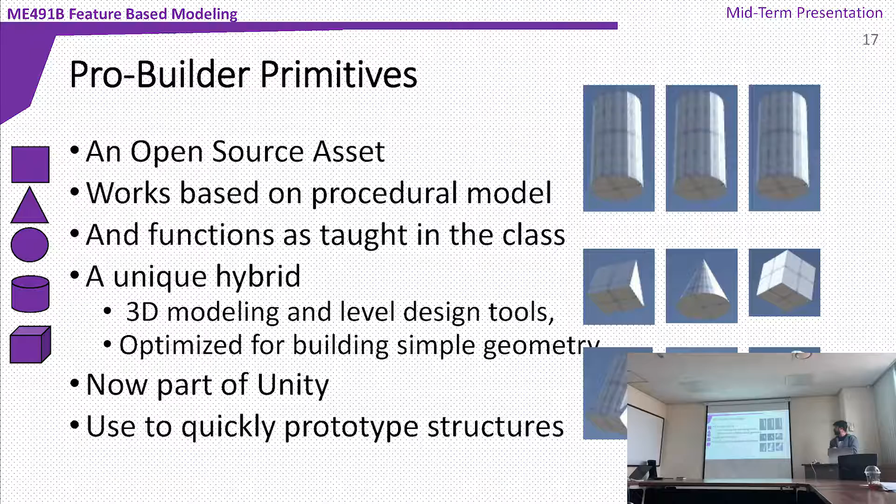And next is ProBuilder based primitives. ProBuilder is a unique hybrid of 3D modeling and level design, optimized for building simple geometry in Unity. It is now available as an asset, and it is also based on the procedural modeling approach. And as per Unity, they say that it will be available within Unity by the 2019 release.

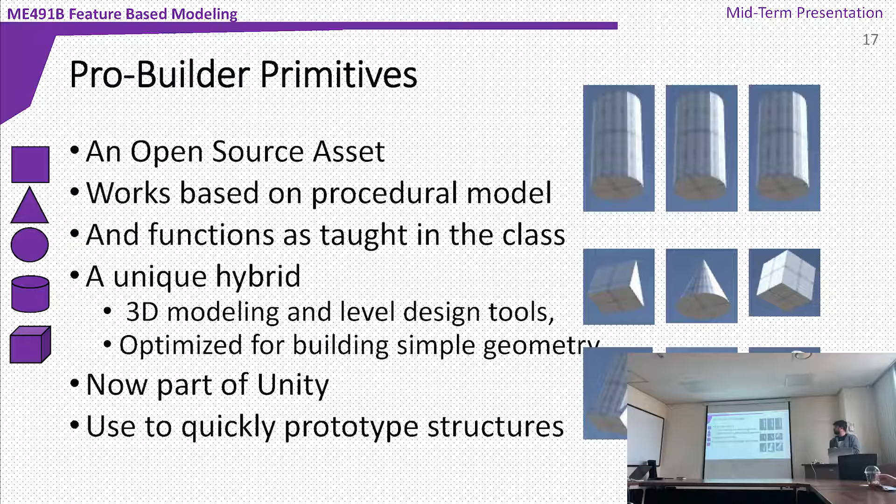So for ProBuilder we did some implementations, like this type of geometry can be made. This is a prism. So we can make something like this just by combining the primitives.

So when this approach is continued, or you remove too much material, there is a problem. The processor cannot handle it, and especially with respect to mobile, there may be some limitations to what extent material can be removed or what kind of material can be removed. So this is the implementation for that.

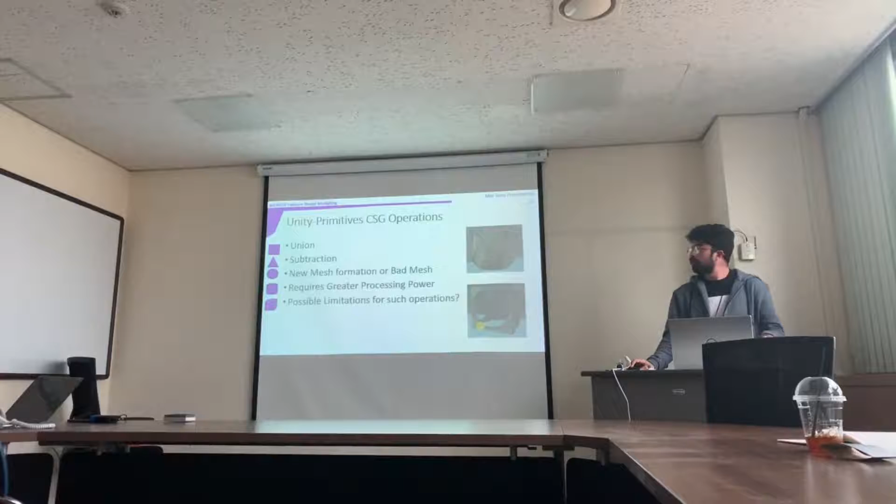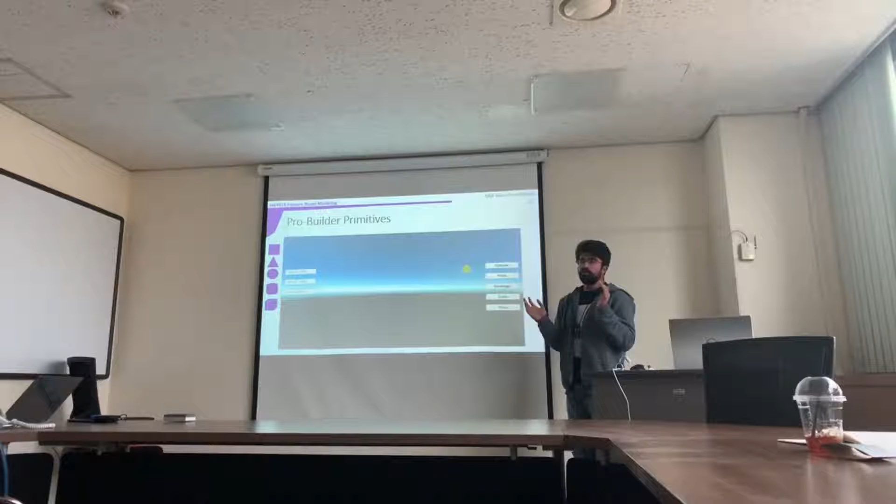What do you want to do with the inputs on the left, like placing the inputs on the left? These small values, what are these for? I tried to input the value for a cube using these inputs. There is a rectangle, and I would like to specify X should be this, Y should be this, and Z should be this. But when I tried to call these into the rectangle, there were some errors.

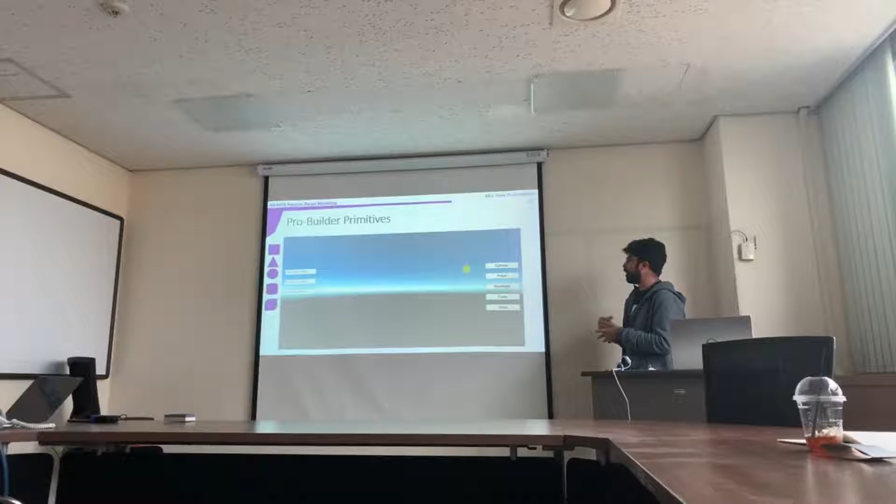And what I have seen, as shown by the TA, is that you cannot put some value directly for the mesh operation. There should be some slider, like there should be a small value already input and you can just vary it. So I will go for that next.

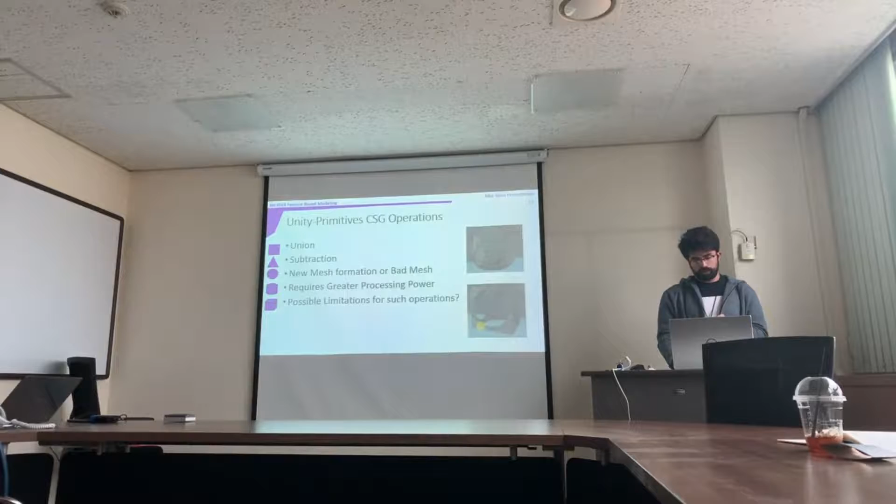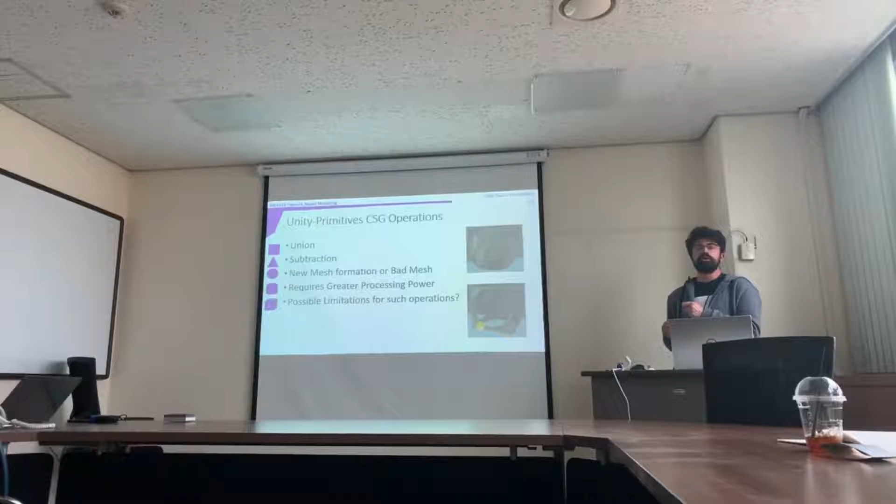So you guys plan to use this sort of Lego building block method and also the ProBuilder subtraction method to create holes? Actually, this method is not the ProBuilder method, it is Unity's method. There is also ProBuilder's method, but I tried to implement that one as well. There were some problems because ProBuilder is in the development stage and there is no API documentation.

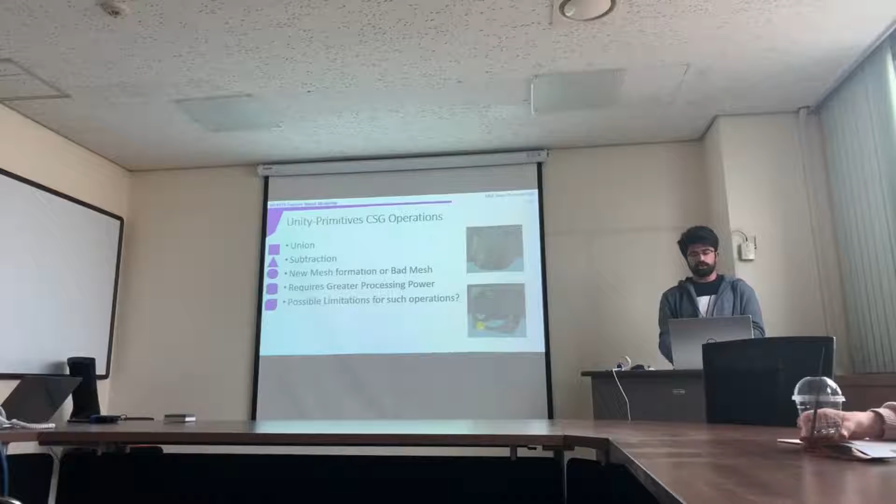So why we used both approaches: because we can use the sketch to make some geometry, and then for removing out of it we will need some primitive geometry, like stamping. We have a source plate and we stamp out. So that is the idea for using both.

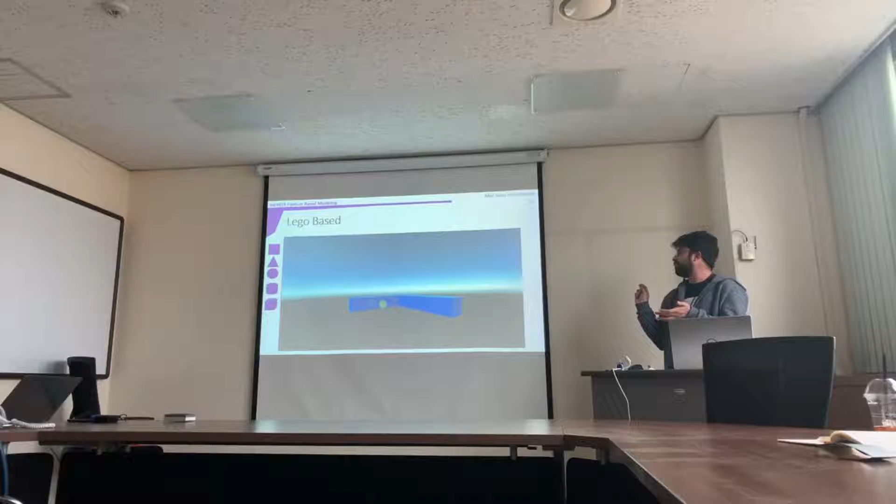Does it go block by block? For the Lego based, yes, it goes block by block, as you can see. In this case, you can just click on each face and it makes up the geometry. So it is like going one by one, but it is very time consuming and may cause problems.

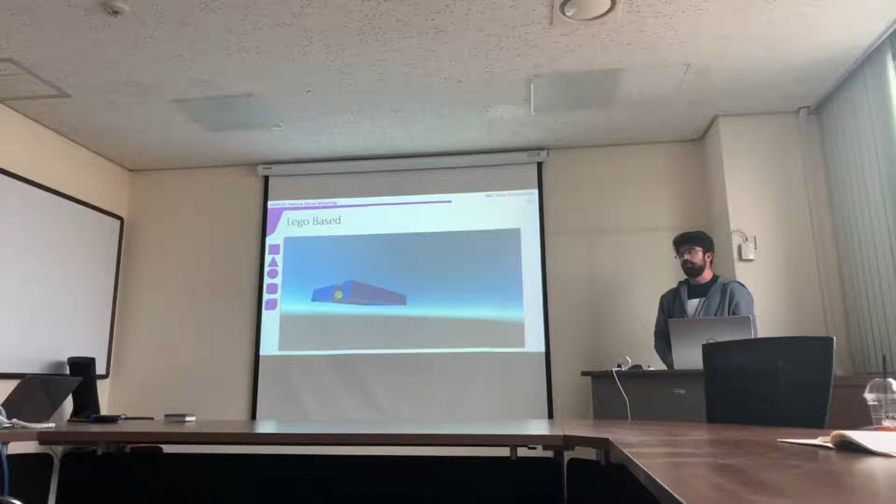So your sketch pictures only show a rectangle. Is there any other sketch geometry? Not yet, none yet. Or no plan? Not yet, none yet. Maybe we implement.

Maybe you can. The code was created to be as modularized as possible. So when a different geometry is sketched, we just have to transfer the vertices position information to the extrude function, so it will extrude the same shape.

I think in today's presentation your team focused on using primitives, and then using the Boolean operation to make some new things. But as you know, the CSG method has some limits for making complex models, because in CSG method it's just primitives: cylinders, cubes, brushes, and others. So how do you cover making some complex model in your method?

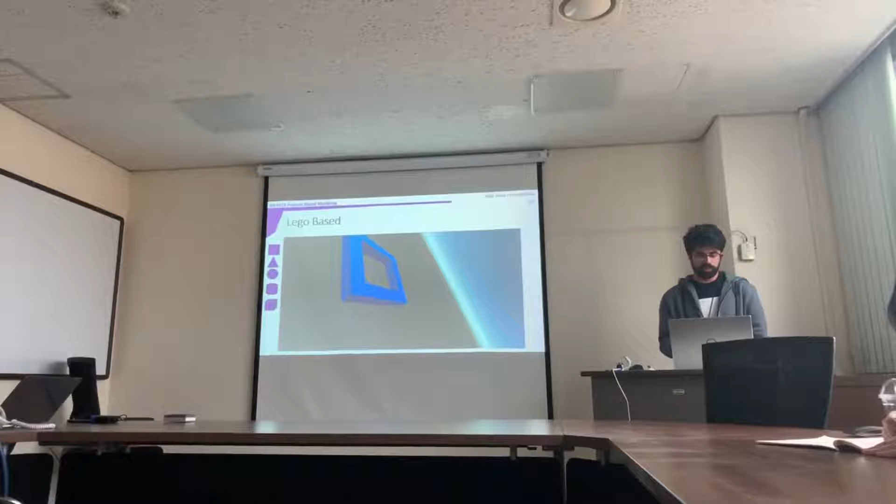I missed your scenario slide. Yeah, the scenario is not very... So you made an L block model? Yeah. We kept it simple because I tried to export the application for mobile, but there were some build issues due to the environment. For the time being, all these implementations are in a Windows environment.

So in this L block, does your system make a polyline or make blocks? Use a polyline sketch, or use block primitives, which one? We use sketch to make that, which is a polyline, with the ProBuilder approach, there's a method where you just click on certain points to create vertices. Once a closed space, a closed plane, is defined, the vertices will form the plane, the shape, and then from that plane we can extrude to form the block.

So you mean you use, like, 1, 2, 3, 4, 5, 6 vertices to make that shape, and then extrude?

How about the implementation on cut extrude? As I showed, for this kind of scenario, we have to pass those game objects to Unity and then check if it works or not.

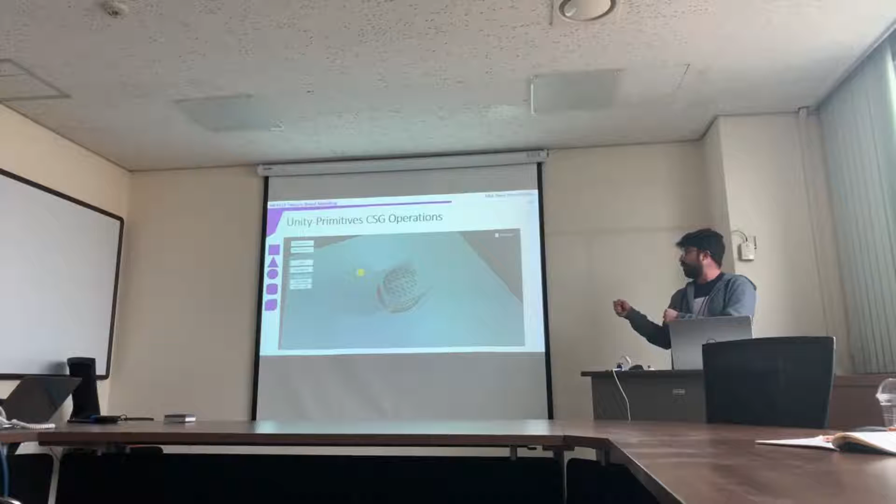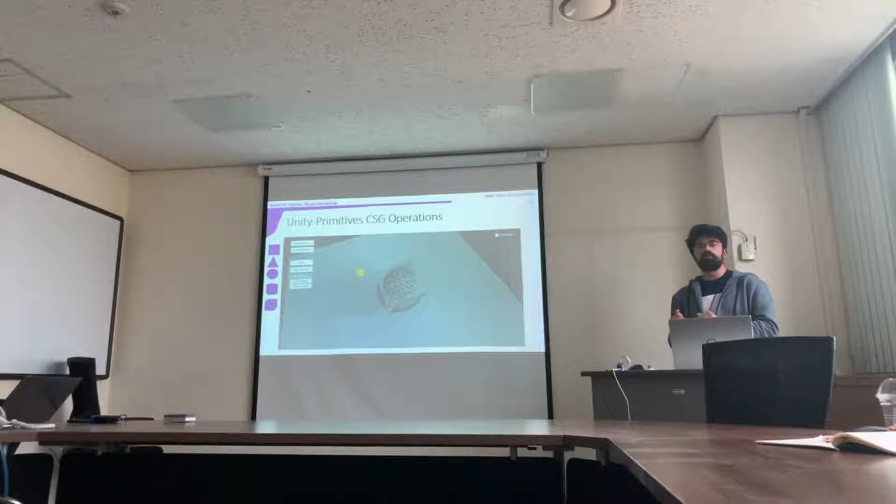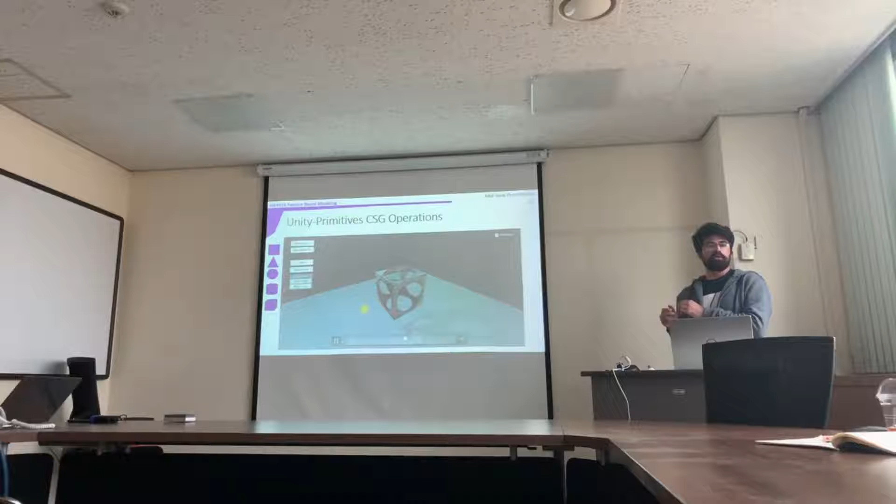Because as I have researched, there are some issues with cut extrude because it is all mesh based. So whenever a cut is performed, the mesh is distorted, like you can see here - the mesh is very bad. So we are not even sure that the phone will be able to process this type of information.

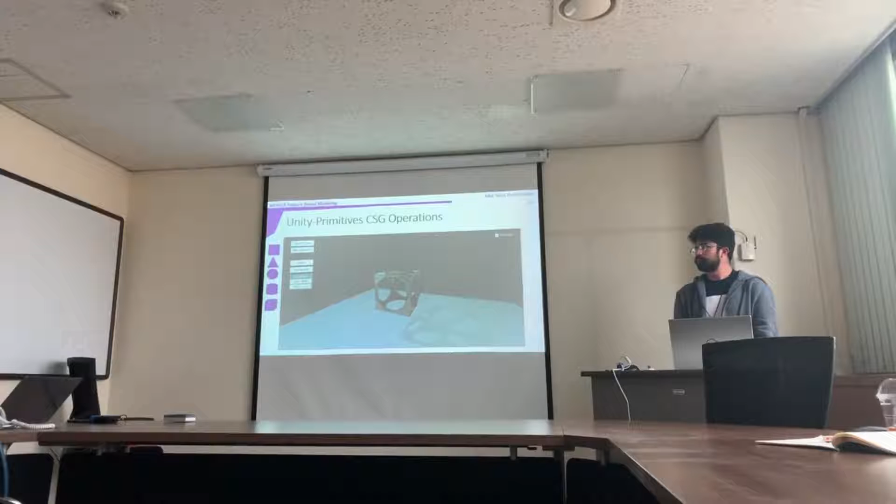In the proposal, you may show us target or goal, and I suggest having two different targets: one the core target and the other additional target. I cannot see any division - is it the same as proposal stage, or do you have some changes to the target?

No changes in the target. The main goal was to use sketch to extrude, and the additional goal was to remove material.

And the second one is demonstration scenario. This is demonstration scenario, right? So I can ask you what you will show us. For the demonstration, we will just be making an L-block. That's it, for the time being.

And using your smartphone, or how will you show it? Smartphone - we will show via smartphone. I want to see the hardware specification.

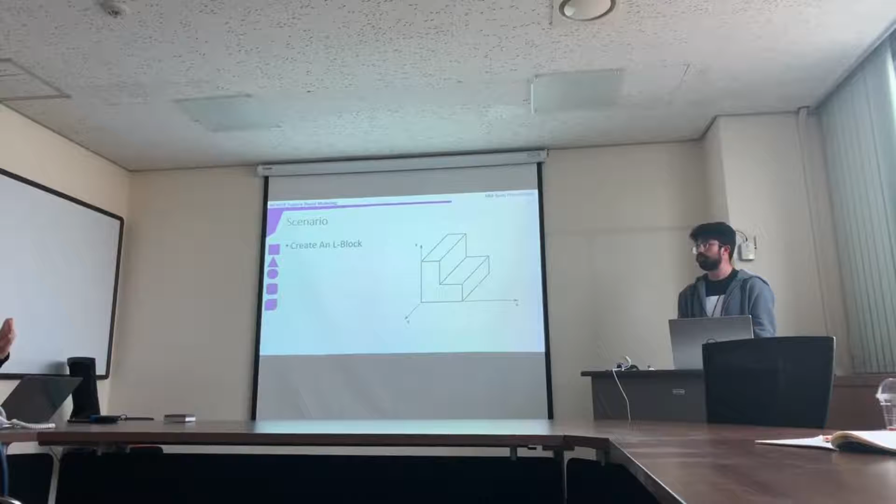Steps of implementation environment, right. Implementation scenario includes what kind of device you are using, what kind of tool, and what the steps can be. The final goal should be developed.

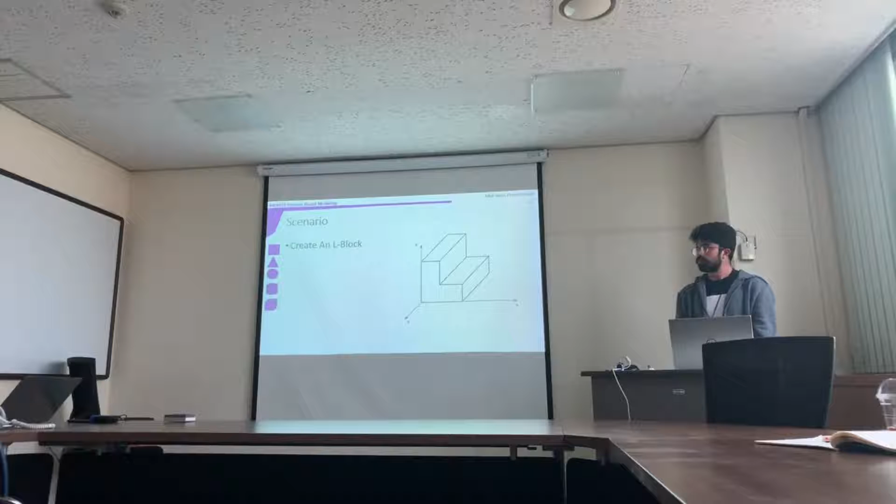So this question is about whether you use any open source in the project. ProBuilder is open source - will you combine this into your project? Yes, I can see you just showed there is a ProBuilder. What is your plan to combine them into your project? So I want to see that kind of thing, right?

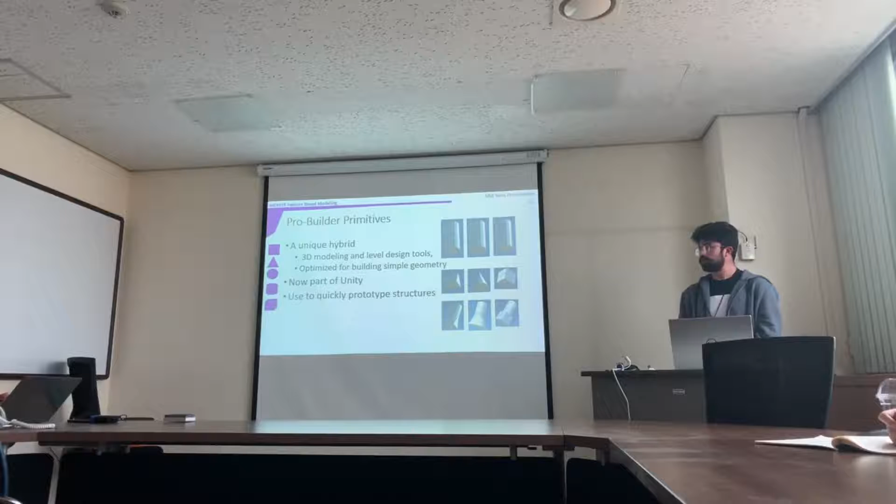So I'll present our midterm presentation for this project, Group C, which is made of Muhtar and myself. So here's the contents of this presentation.

We have done the sketches. We have done the 3D geometry we wanted to do. So we'll see that in detail.

So for this project, we've used Unity, only Unity. 90% of the code has been made from scratch. We don't use another open source material. And most tests are done in the Unity editor itself.

But we also sometimes use Unity Remote, which is an app for mobile. You plug your phone into your desktop, and when you run the editor in Unity, it projects on the phone what's in the editor, so you can try the inputs to register, you can try to play the app on the phone. But if you want to use that, you have to be aware that the UI would be deformed.

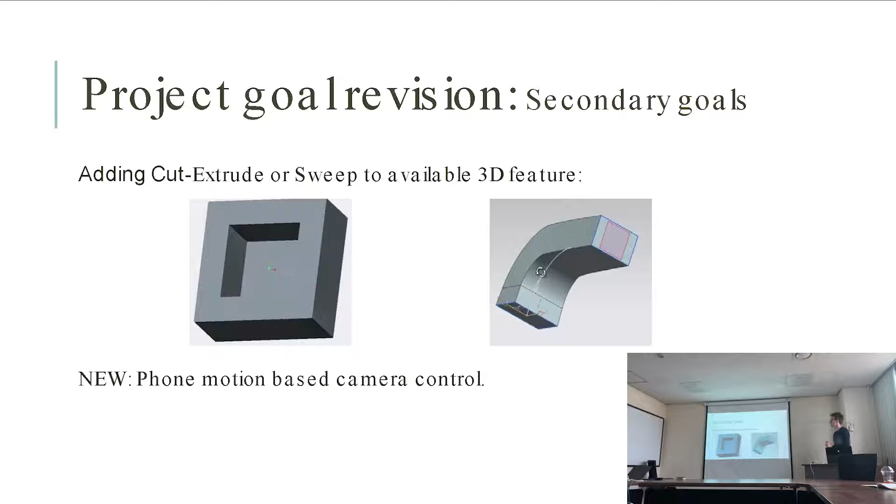And also a reminder of our secondary goal: we may want to add cut extrude if we manage to have the time for that, and sweep also. These are our references, and just a reminder of the future schedule. So that's it.

Any questions? No question?

So you guys will use rectangle and circle geometry only, or would you add something more? We may want to add polygon-based geometry, where you decide the amount of edges you want to input, so you can make triangles, pentagons, and stuff like that. We may want to add that.

Do you have any plan how to implement cut extrude? Not yet. We have not really looked into the code of this.

On your team, did you test with the software on a smartphone? Yeah, we've done some tests with touch, but we've seen that the UI was totally deformed. So this helped us track this issue. We solved it, and since then we have not tested more.

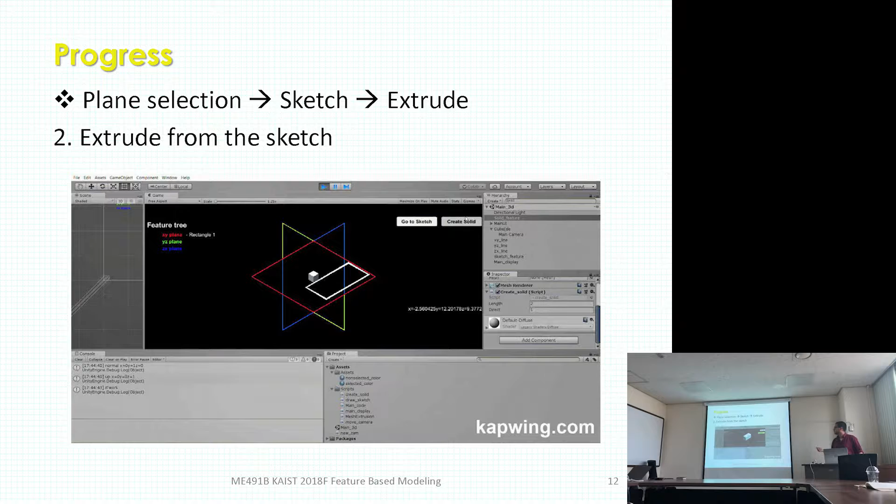Once the sketch is done, we can go to the main menu and select the extrude button, which extrudes it to a certain length, and then we can adjust the length manually or on the mobile phone, perhaps using a slider. So this is the first video showing the overall mechanism, let's say.

So in this video, we will be drawing a cuboid from a rectangle sketch. I actually slowed it down because I worked too fast. So once the sketch is made, we extrude. We modify it. And similar to the previous team, we also want to use a camera that has panning and zooming. And we are able to change the direction.

However, we do not have the zooming feature yet, which is actually very simple. We will use mouse scrolling, and we will implement that soon. The next video is to show that we didn't only do it for a rectangular cuboid model, but also for a cylinder.

And once the camera is fixed, we will move on to also drawing polygon shapes. And as you will see, we can use our camera to rotate the view as well. Like that.

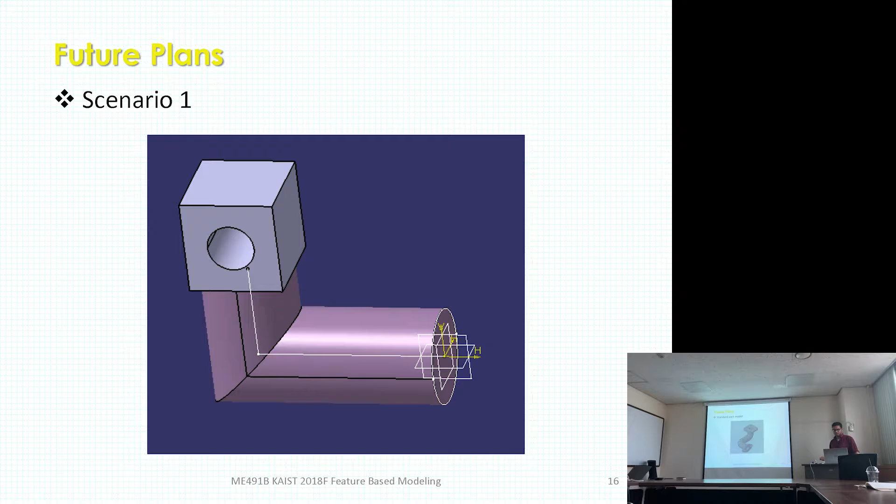And for the additional functions, we have almost completed our viewing transform. We just need to add some sort of zooming function. And we also believe that Unity has the option of viewing in landscape or portrait mode. We would also like to be able to revise the parameters once the model is made.

And lastly, this is the most ambitious one, and it may not be possible, but we hope that there is some way of taking an image and then recognizing shapes, which it will then import to our program. I think some of you are familiar with software that does this, like OpenCV, which recognizes geometry, but in our initial research, we found that Unity may not have the capability to do such a thing, but we hope that it will be possible.

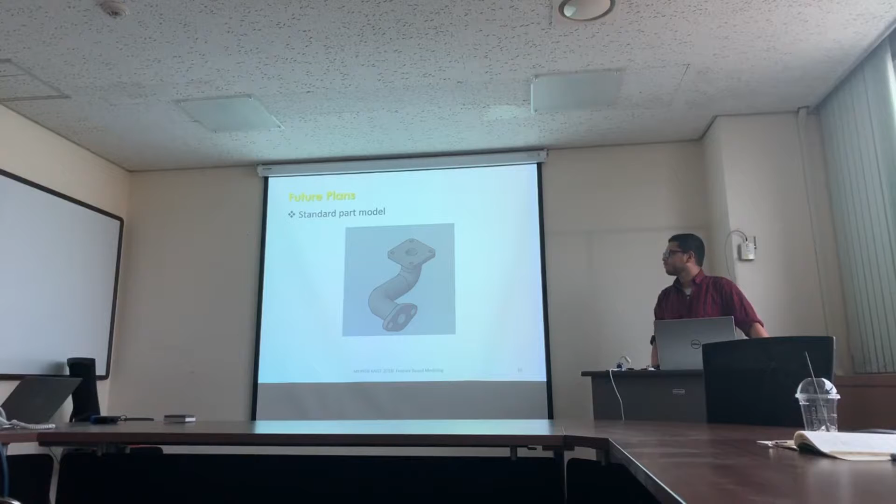My second question: is this sweep hollow or full? I think it will be hollow. Because with respect to Unity, you have to make two meshes. One is the outer, then the second is the inner. Okay. So I tried to make half things, but it does not work. It shows as just a hollow mesh. So you may have some problem.

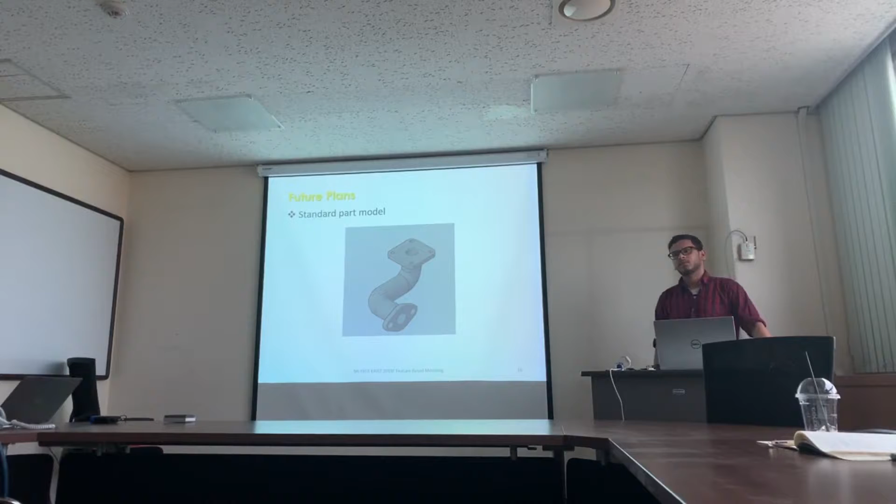Can you go to the plane section? Yes. Okay. So how does it select the plane? I mean here, unlike in your case where you directly click on the plane, we have the buttons, and the button is assigned to a certain plane, and then the camera pans to that specific selected plane.

But I think that since there is no shade or something, it may be difficult to understand on which plane the actual object is. Okay, I think that is not a very difficult fix. We can just fill the plane completely. It was sketching in XY plane, or the red plane. Why? Oh, just an example. The example should be like XY and YZ. Okay.

When you do rotation, it's rotation around the center point. Yeah, we use the origin, the center, as a pivot for the camera, and we zoom or rotate around that pivot. This is a comment, not a question. As Sahil said, for the sweep, I think it's easy to make a solid sweep. But something may already be available for making all those sweeps.

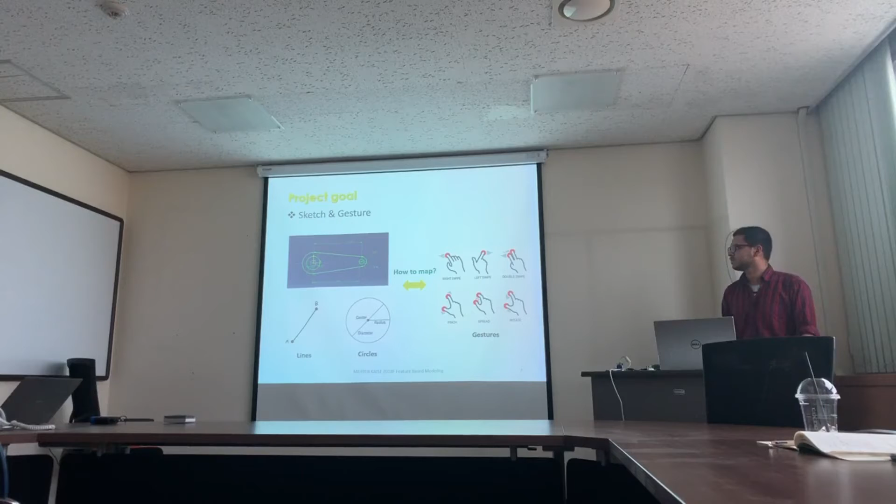Okay, and the last one is, what is the specialty of your software compared with other teams? I think our team is closer to the second team than to the first, but hopefully we will be able to have some sort of additional feature that distinguishes ours from the others, such as parameter revision or maybe shape recognition or something like that. Thanks.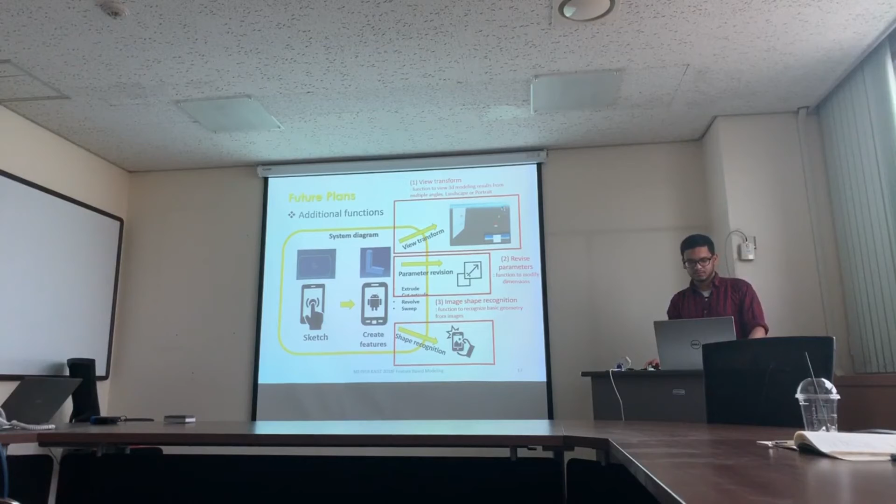Right. It seems to me that you are still working on PC, not moving to mobile. Right? Not yet. I think you need to move to the mobile environment as well, because it will be different. Actually, we tried to format that for the basics because it's the prominent function. Yeah. So anyway, you need more time to work with the smartphone. It's different from PC, right? All right. Good.